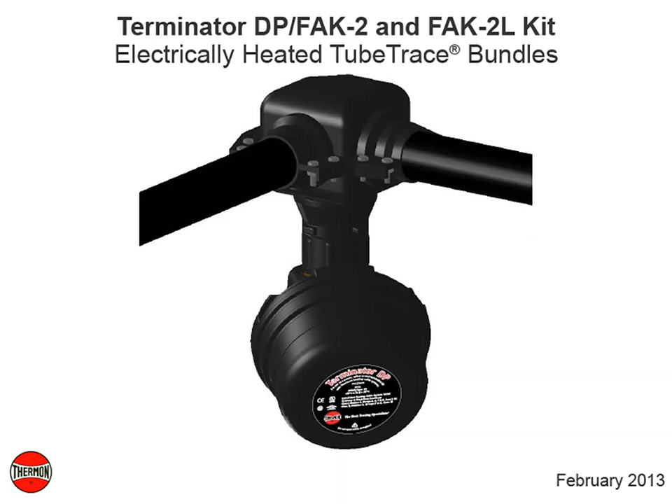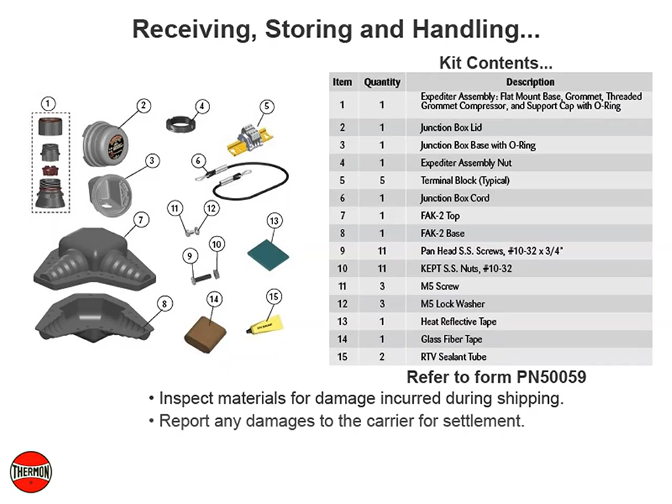Receiving, storing, and handling. Inspect materials for damage incurred during shipping. Report any damages to the carrier for settlement. Identify parts against the packing list to ensure the proper type and quantity have been received, and store in a dry location.

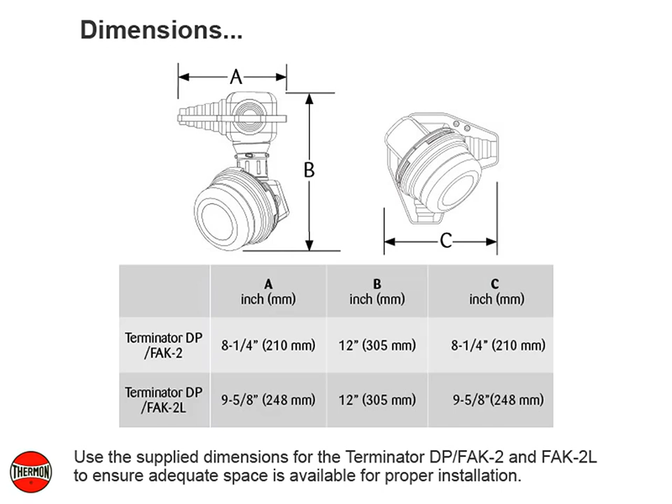Use the supplied dimensions for the Terminator DP FAK2 and FAK2L to ensure adequate space is available for proper installation. The following kit is required for power and end terminations. One kit is needed per heater and must be ordered separately. Refer to Form PN 50132.

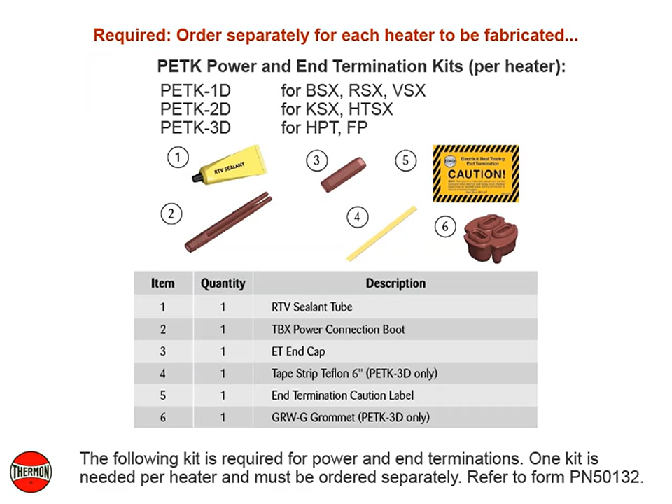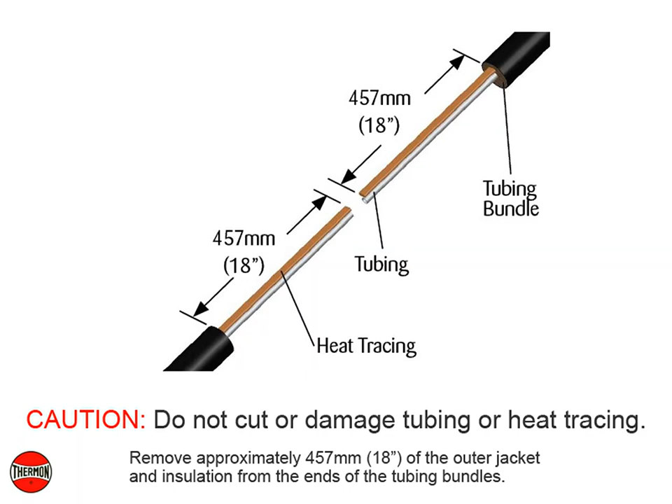Remove approximately 457 mm or 18 inches of the outer jacket and insulation from the ends of the tubing bundles. Use caution to not cut or damage the tubing or heat tracing. Trim both ends of the tubing to within 38 mm or 1½ inches of the end of the insulation. Use caution to not cut or damage the heat tracing.

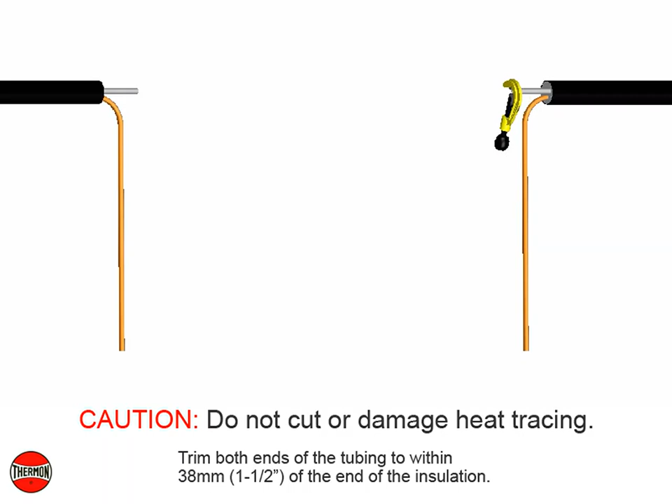For zone-type heat tracing, strip back the bundle insulation 38 to 76 mm or 1½ to 3 inches beyond the bus connection indentation of each heat tracer. If the bus connection indentation is less than 305 to 381 mm or 12 to 15 inches from the end of the heat tracing, proceed stripping the bundle insulation to the next indentation.

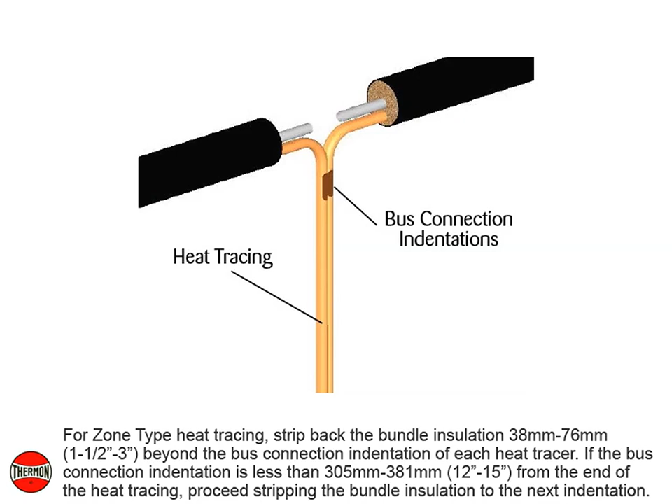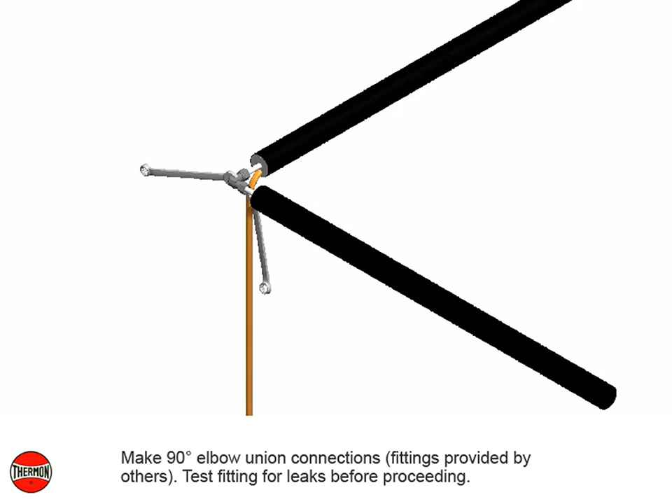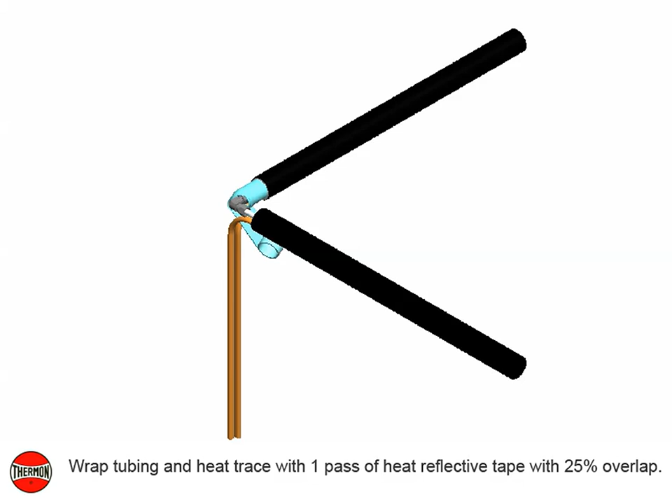Make 90-degree elbow union connections, fittings provided by others. Test fitting for leaks before proceeding. Wrap tubing and heat trace with one pass of heat reflective tape with 25% overlap. Wrap with 3 passes of glass fiber tape with 50% overlap, or until fiber tape is equal to original bundle insulation thickness. Complete with an additional pass of heat reflective tape.

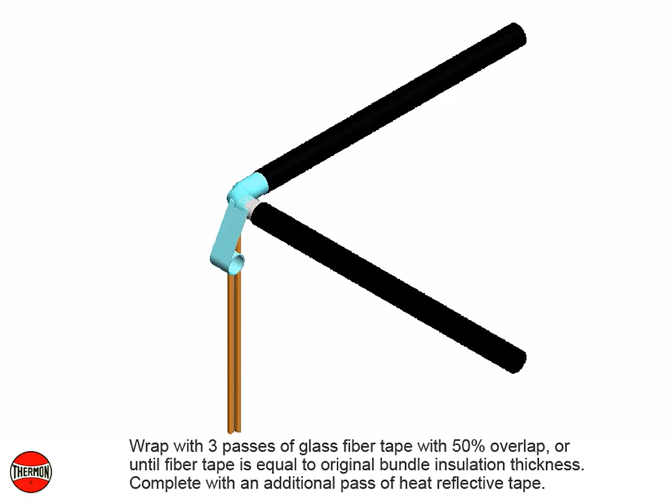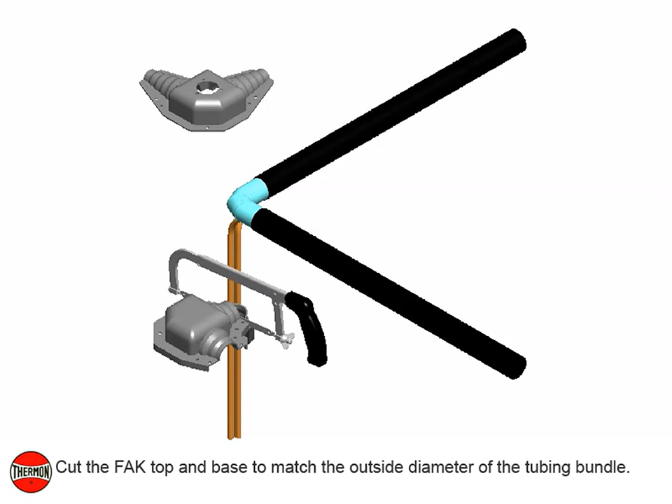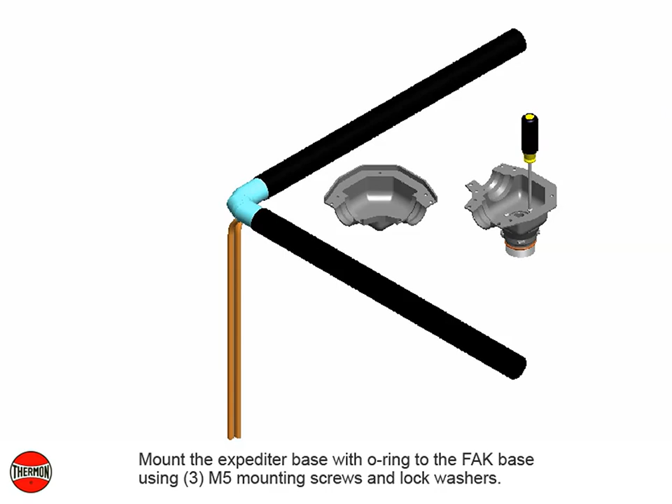Cut the FAK top and base to match the outside diameter of the tubing bundle. Mount the expediter base with O-ring to the FAK base using 3 M5 mounting screws and lock washers. Punch out the weep hole in the expediter base. Form a gasket by applying RTV sealant to the FAK top and along the radius of the FAK base as shown.

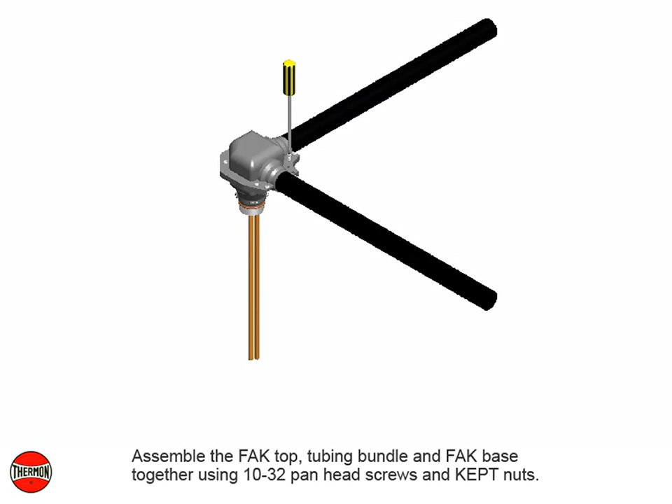Assemble the FAK top, tubing bundle and FAK base together using 10-32 panhead screws and KEPT nuts. Terminate the heat trace with the appropriate PETK termination kit. Refer to the PETK instructions for details not addressed here. At completion of termination, push excess heat trace back through expediter.

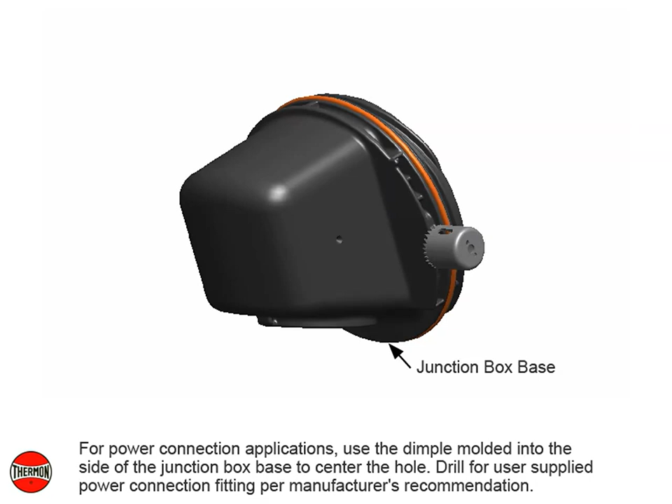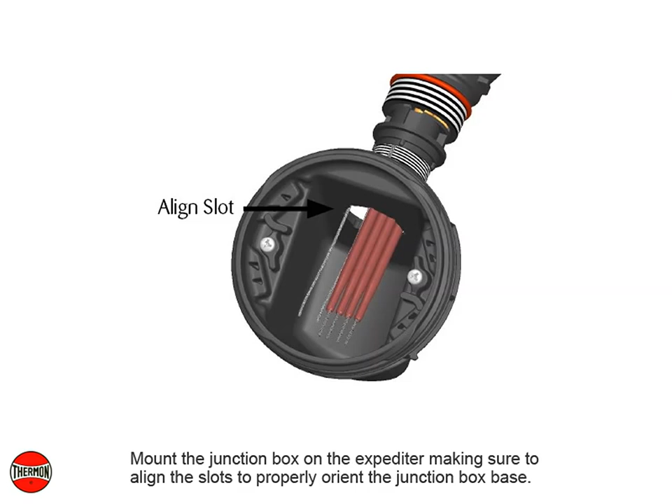For power connection applications, use the dimple molded into the side of the junction box base to center the hole. Drill for user-supplied power connection fitting per manufacturer's recommendation. Mount the junction box on the expediter, making sure to align the slots to properly orient the junction box base. Install the quick mount terminal block, twist to position and tighten.

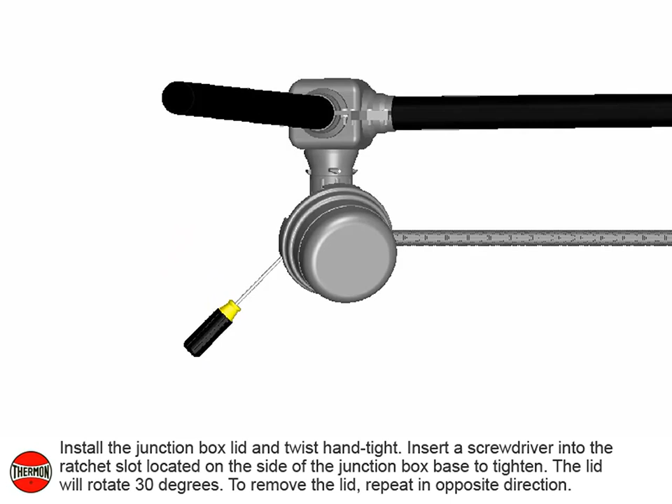Complete system wiring between fabricated heat tracing and power supply wiring. Install the junction box lid and twist hand tight. Insert a screwdriver into the ratchet slot located on the side of the junction box base to tighten. The lid will rotate 30 degrees. To remove the lid, repeat in opposite direction.

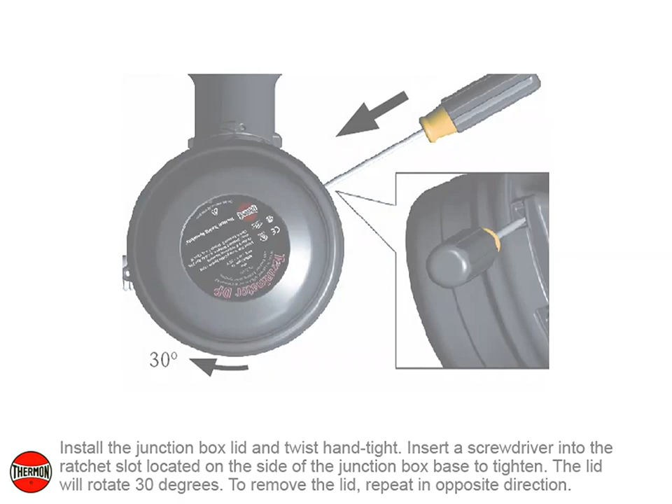Completed Terminator DP FAK2 and FAK2L kits for electrically heated tube trace bundles.